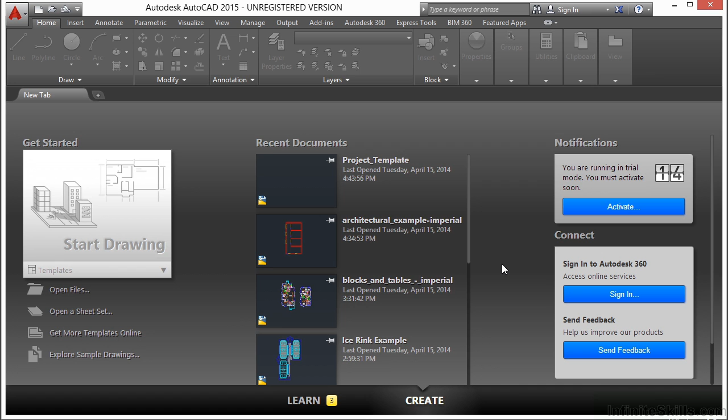Let's open up the dimension example drawing for this chapter.

Dimensions can also be associative, non-associative, or exploded. Associative dimensions adjust to changes in the geometric objects that we measure. I recommend that you always use associative dimensions, especially if you're placing your dimensions in paper space, as is the example here. Dimension associativity defines the relationship between your objects and their dimensions. Now, there are three types of associativity between geometric objects and dimensions.

Associative dimensions automatically adjust their locations, orientations, and measurement values when the geometric object associated with them is modified. Dimensions in a layout may be associated to objects in model space. That's where the DIMASSOC system variable is set to 2. We'll go over this later on.

Non-associative dimensions do not change when the geometry changes that they're measuring. The dimension variable set for this is DIMASSOC set to 1.

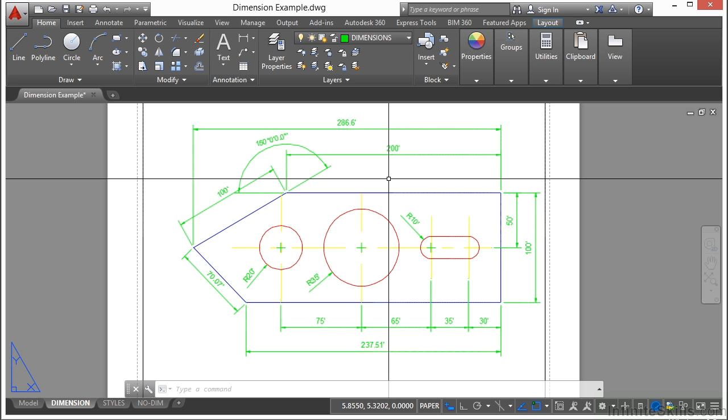Dimensions have several distinct elements. They have the text, they have dimension lines, that's the horizontal line here. They have arrowheads, which you can change to be many different shapes. They also have extension lines. Those are the vertical lines that you see here that come from the object they're dimensioning and extend up to the dimension line and arrowhead.

All of these can be controlled, defined, and altered through a dim style, or dimension style. And this can be done also through a properties manager.

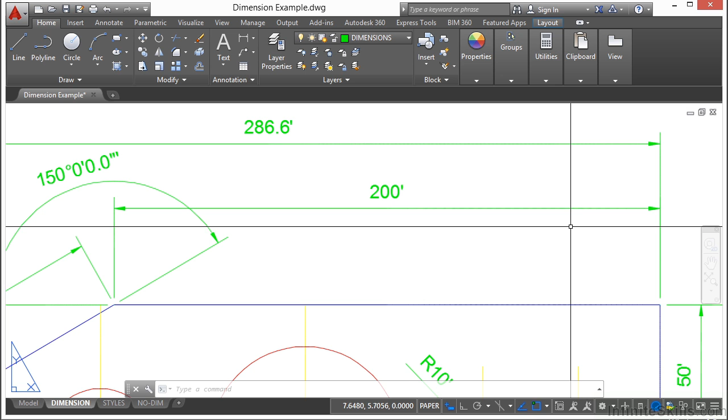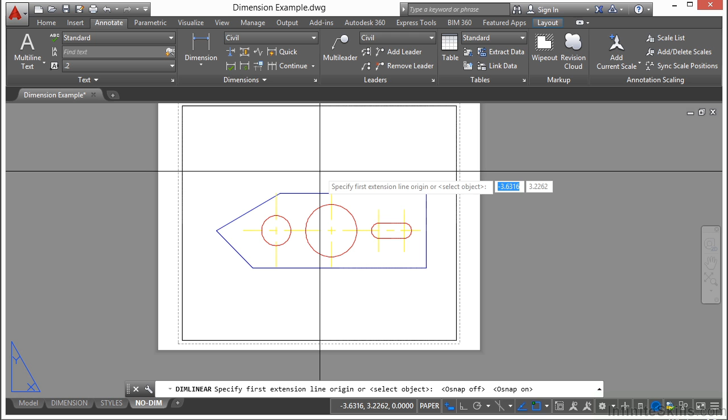Let's make some basic dimensions. Let's go to the No Dim Paperspace tab. Go to the Annotate tab on the ribbon. Go to the Dimensions panel. Click on the arrow here from Dimension and click on Linear. Make sure your Osnaps are turned on and that you have your endpoint Osnap running. When you're set up that way, you'll be able to create some dimensions very quickly.

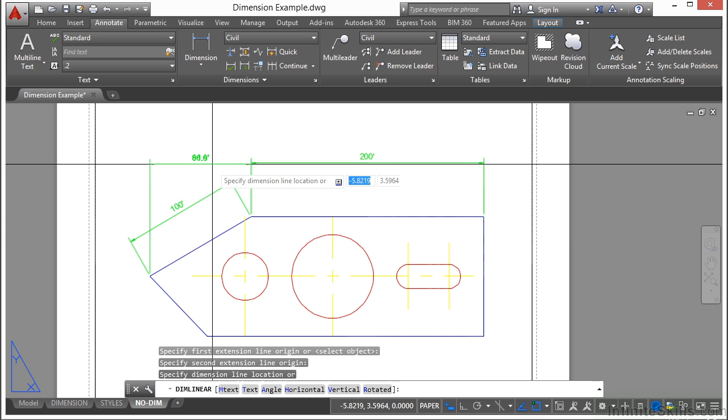I'll show you. I snap to here, and I have my dimension. If I select my aligned dimension, I can get dimensions at angles that give the true length value. If I go back to my linear dimension, this will create a dimension that is locked into horizontal or vertical orientation. Those are your basic dimensions, the linear and the aligned.

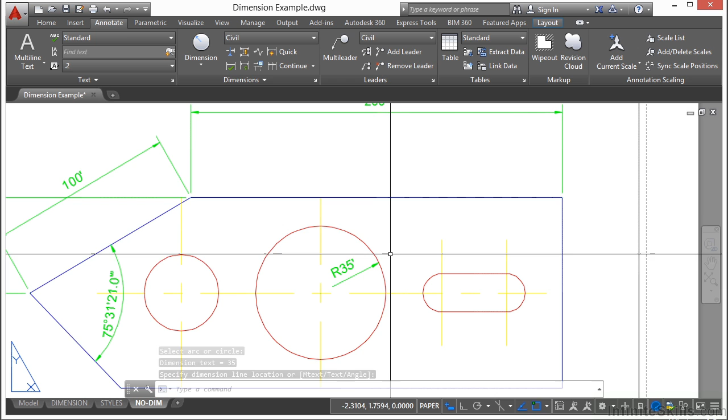Now, an angular dimension will display the angle between two lines or objects. Radial dimensions will give you the radius or diameter of a circle or arc. Just select the object of the circular nature and then pick where you want it to go. That is the very basic use and application of dimensions. We're going to get into each part of it a little bit more in detail.